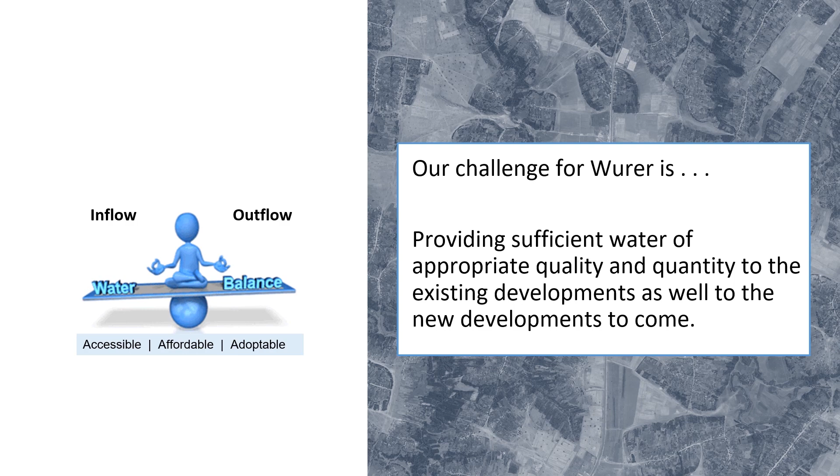We try to redefine the challenge as aims. First, to offer a resilient and sustainable rural transformation, and next, to approach rural challenge with water sensitivity and use it as one of the driving forces for the new development. So, what does it mean? When we say resilient, sustainable, and rural transformation, we meant to integrate existing rural fabric with the new development first, and to use new development as a catalyst for spatial and social cohesion among the communities, and to create an accessible, well-connected, pedestrian-oriented street network.

And what we meant by water-sensitive development is to design a water supply system for providing safe drinking water to the locals and distributing it by gravity without the use of mechanical means as far as possible, and to protect streets from runoff and to replenish the groundwater.

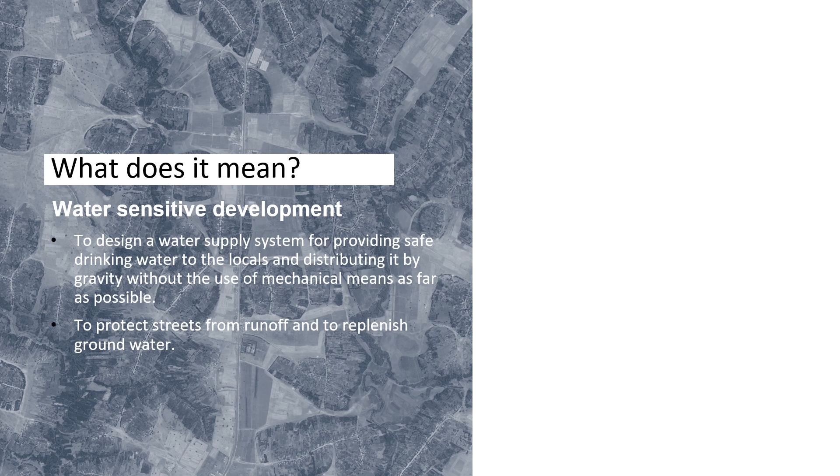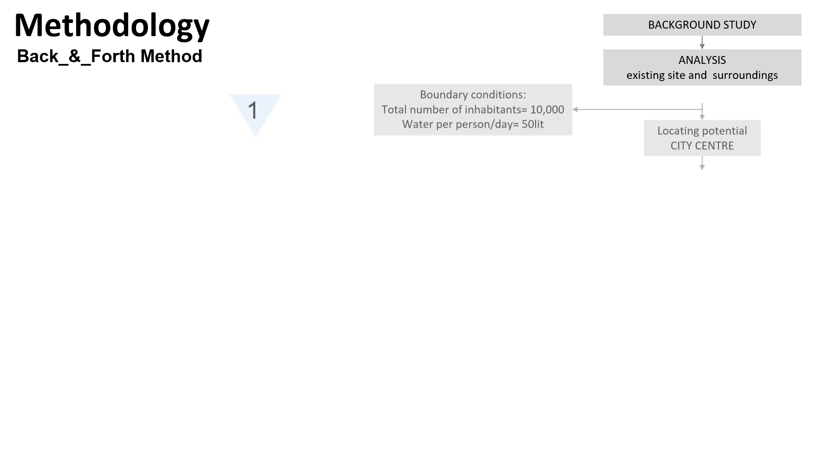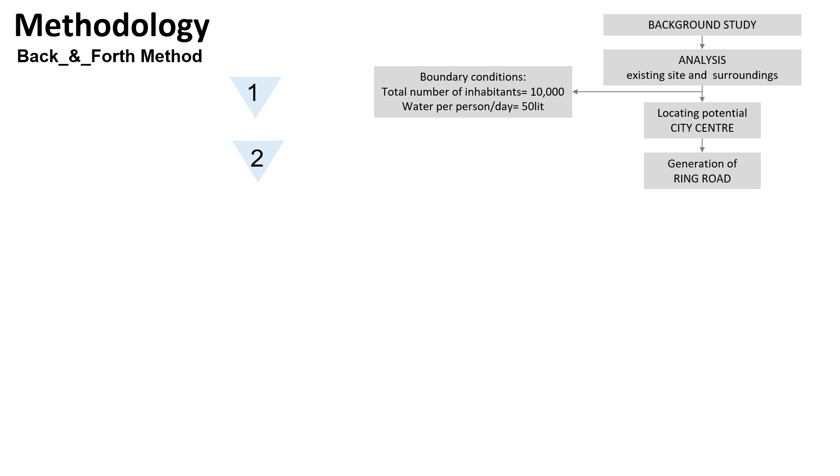The methodology we have tried to follow is a back and forth method rather than the linear one. So, first we tried to see the background study of the site and analyze the existing sites and surroundings. And first we put the boundary conditions as the total number of inhabitants to be 10,000 and water per person per day to be 50 liters. Then we tried to put the potential city center and generated the ring roads. And we get the first result by interconnecting this ring road with the generation of internal streets.

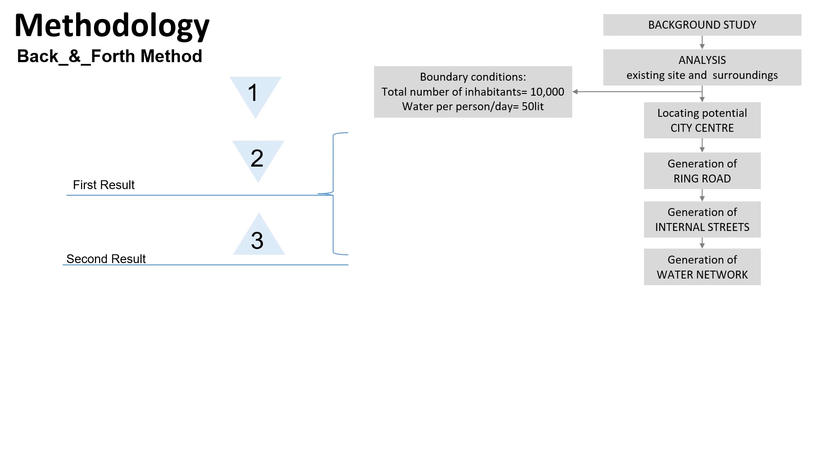Then as a second result, we try to follow the water network and get street networks. The third result is by positioning the water tank in different areas and getting an option for a blend of communal taps and direct access to water, and elevating the water tank to supply water by gravity to each household. Then we get the fourth result by checking the rainwater runoff on the streets. The final result is driven from adjusting streets and water network to reduce the runoff and get the hydrology-driven street network.

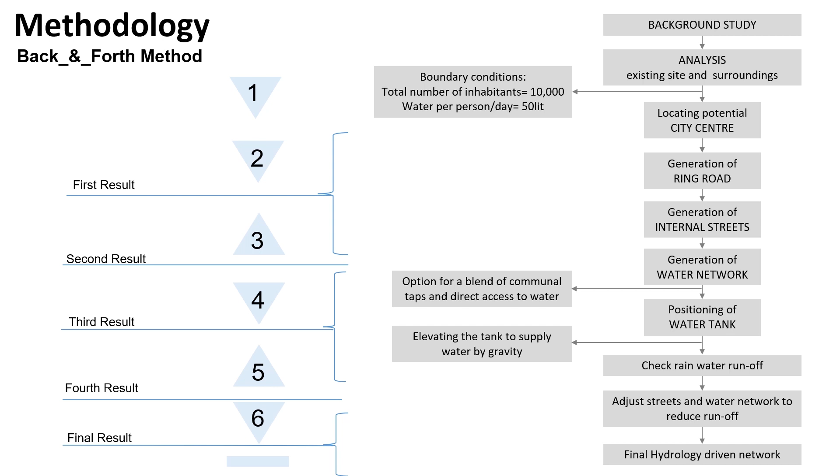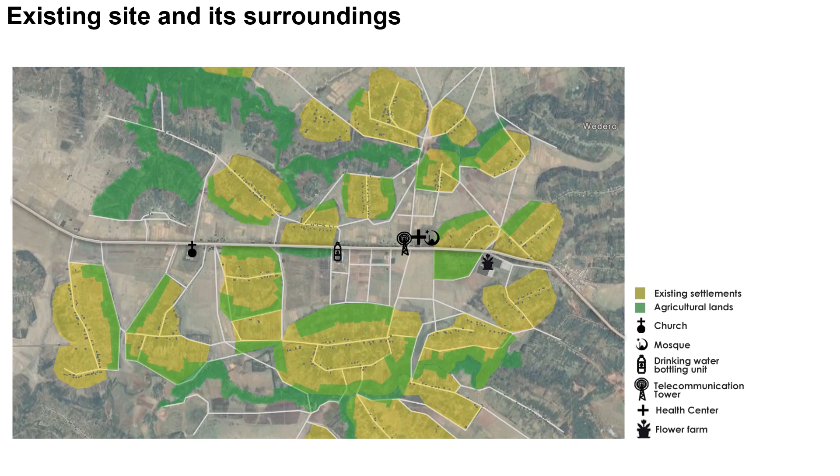Wurer is located in Southern Nations and Nationalities, Gurage Zone, Chaha Wereda. When we see the existing conditions of Wurer, there are different neighborhoods located apart from each other. This will make the infrastructure provision more challenging and costly, and also have an effect on the social connectivity. Inside every neighborhood, there are existing settlements and agricultural land. The main highway in the center dissects the village into two. There are different social and physical infrastructures like mosques, churches, telecom tower, and healthcare. The flower farm and the water bottling factory provide the inhabitants work opportunity.

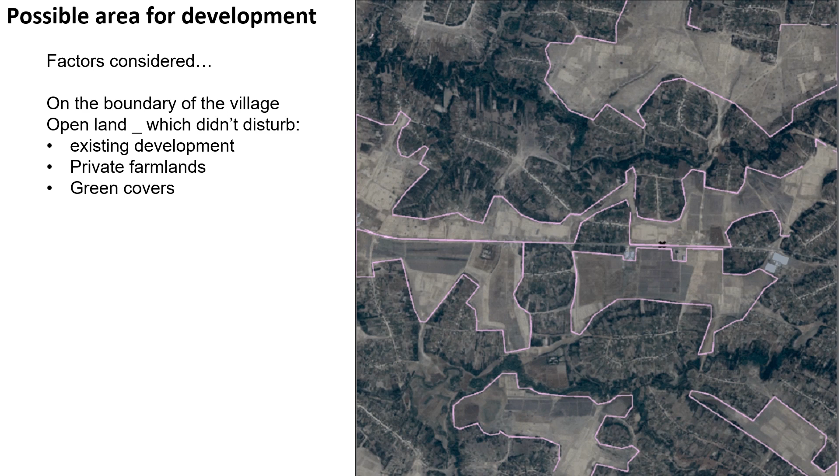When we select a possible area for development, first we consider it to be on the boundary of the village, and it should be an open land which doesn't disturb the existing development, private farmlands, or green covers. One of the end products is a city which can house 10,000 inhabitants, besides creating social cohesion among the disintegrated current neighborhoods. We use the existing main street and observe where there is a relatively larger number of neighborhoods, quarters, and open land available.

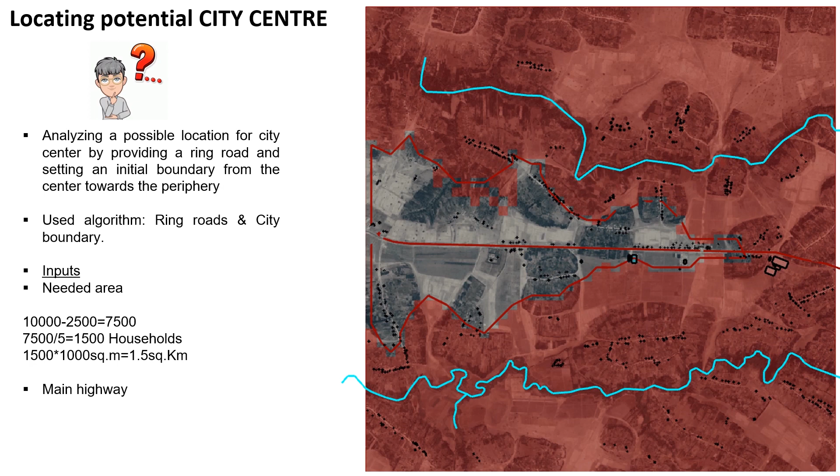Putting this in mind and using the ring road algorithm, we try to define the city boundary and at the same time redirect the current main highway to the outskirts of the development. This in turn creates an opportunity to connect the agricultural production to market easily and creates less traffic and a more pedestrian-friendly environment in the city center. Considering all this, we have put our finalized location of the city center, taking into consideration existing significant infrastructures and using the algorithm of ring roads and city boundary, and we get this final output.

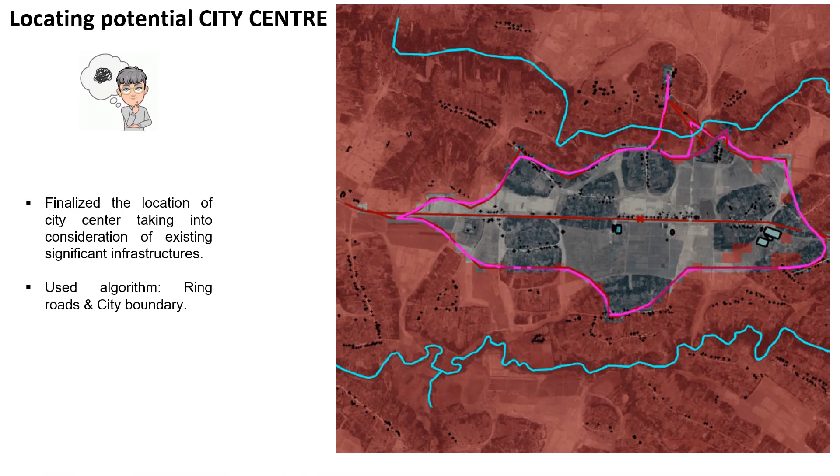As we mentioned earlier, we tried to specify the possible open areas for a new settlement without interrupting the existing ones. Later, we tried to integrate both the existing and newly generated settlement to provide a holistic development approach. Our newly generated street segments possibly covered an area of 1.5 square kilometers, providing 1,000 square meters of space per household and 5 persons in each of them.

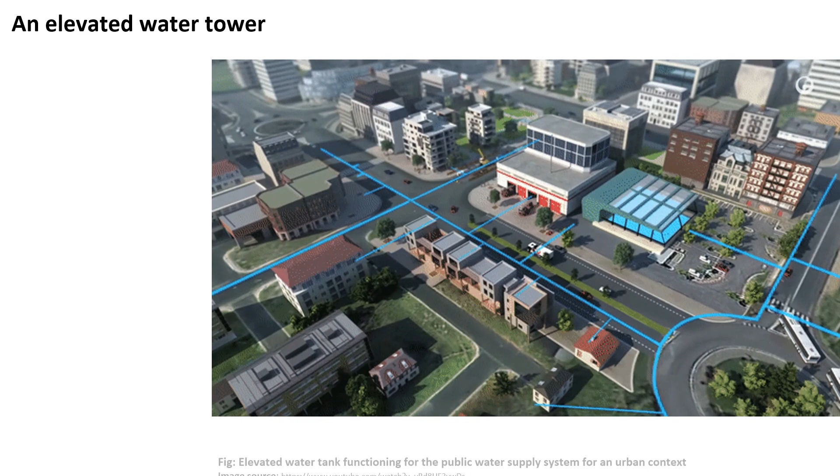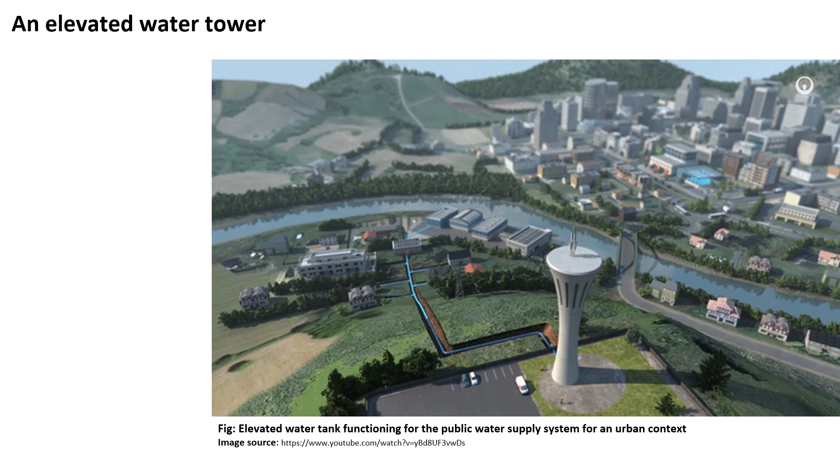After getting the street pattern, we were concerned about positioning the water tank to generate an efficient water supply network for our new city. While analyzing the topography of this specific area, we discovered that the terrain differences are very mild and an elevated water tower might be needed to provide an uninterrupted water supply to the future settlement with the help of gravitational force. Moreover, an elevated water tank could have some advantages, such as not only preserving water but also energy. It helps pressurize the entire water system using its height, and as a result, the pressure within the pipe network keeps the water free of contaminants.

It's important to have an overview of how an elevated water tank functions in order to realize its importance. During the daytime, electricity demand is high, so running a pump might be very costly, but having an elevated water tower would provide an opportunity for the water system to run by itself using the pressure without using a pump during the daytime. During the midnight, the demand for both electricity and water is low, so the pump could run in order to fill the water tank.

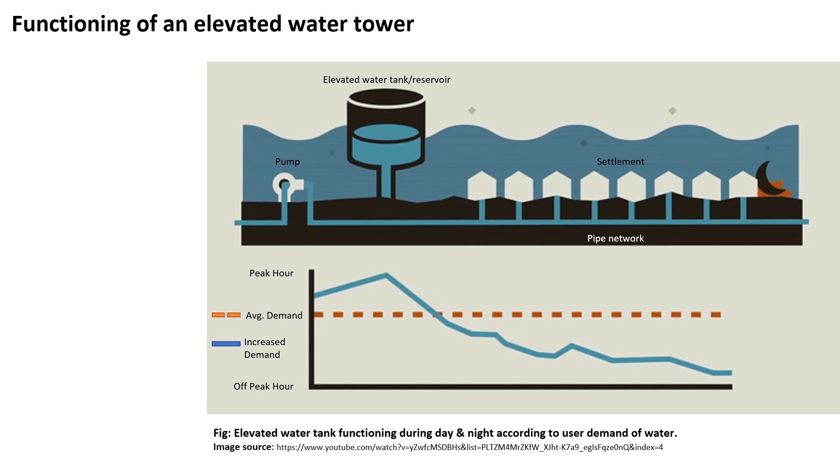As the day starts and progresses, the demand for water will start to increase and eventually be supported by the storage of the tank. The pump itself might not be able to fulfill the demand of the entire city during the peak hours, but it's the water tank that makes the difference in the game. As the day ends, the tank will again be filled with water and get ready for another cycle, which is an ongoing process altogether. It's also important to know how elevated a water tank needs to be.

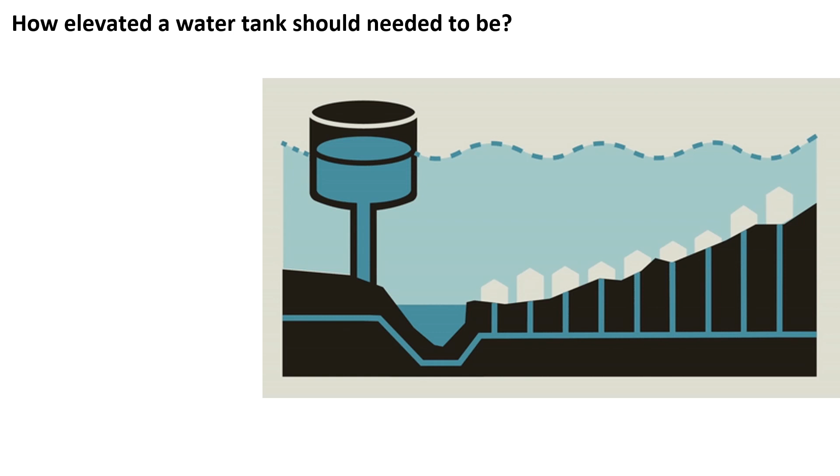Pressure within a body of water is related to the depth. The deeper the water, the greater the pressure. It can be compared to a virtual ocean under which we all live. The water surface in the elevated storage tank represents the surface of the virtual ocean. Thus, a tank elevated to 20 meters creates about 200 kilopascals, and a tank elevated to 70 feet creates about 30 psi of discharge pressure, which is sufficient for most domestic and industrial requirements.

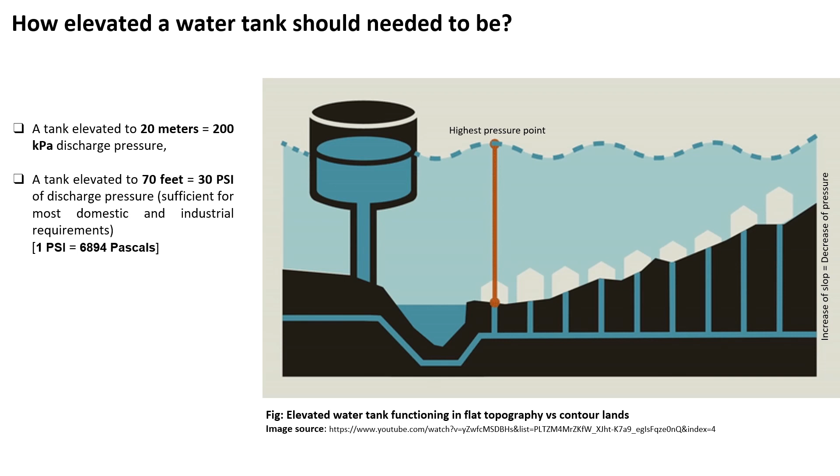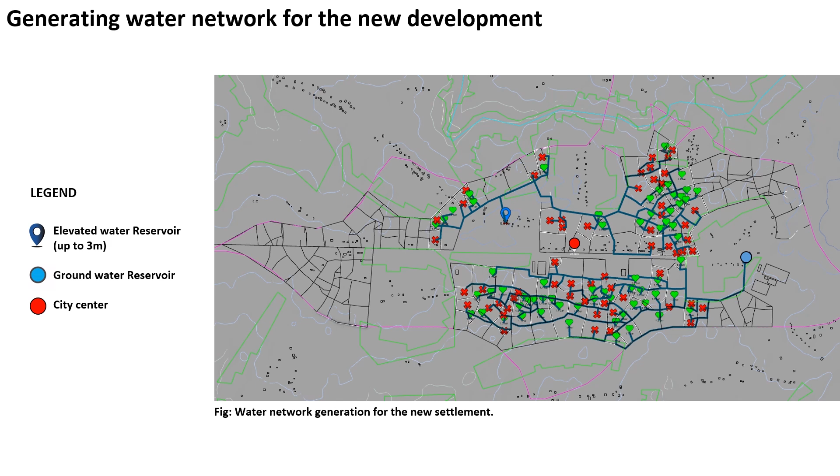Based on the generated street pattern, we tried to formulate the best possible water supply network to provide as much water as possible to the households. We are considering 2 water reservoirs at 2 different locations of the city to provide maximum water supply. Among them, one reservoir is elevated up to 3 meters, considering all the buildings are one-storied initially. The other reservoir is positioned down to earth.

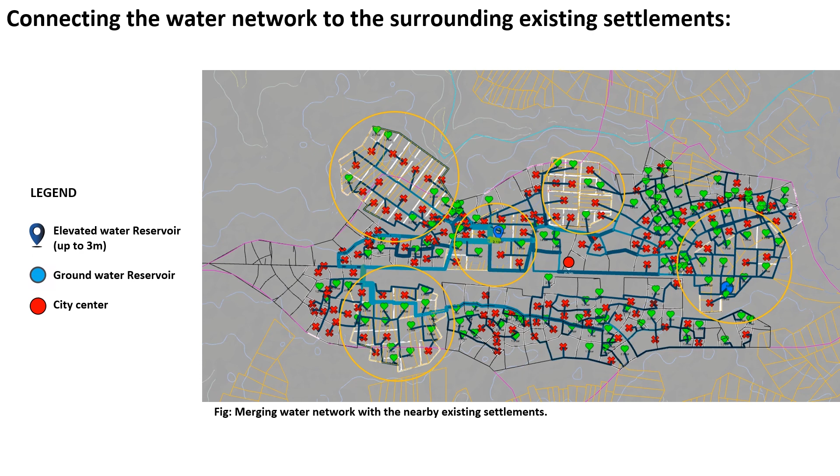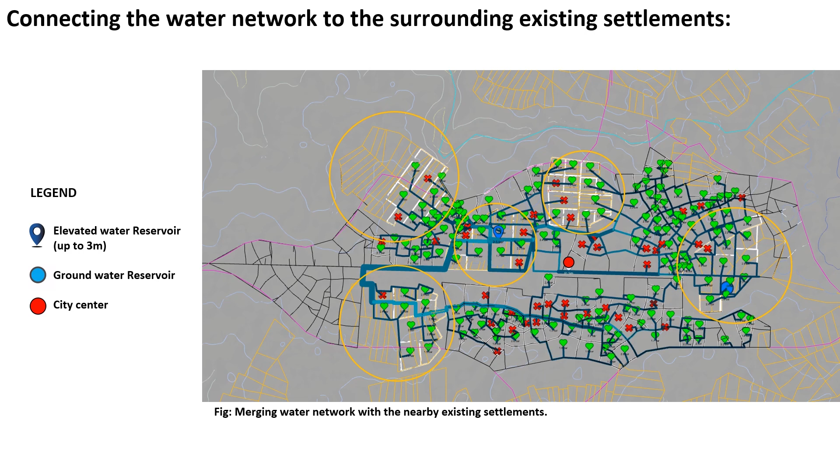After having an efficient water supply network, we tried to merge nearby existing settlements within the supply chain and rerun the urban water generative hydrology network analysis, which worked fine even after the integration of the existing households. We observed an average pressure of 1.7 bar on each supply point, which is more than sufficient for an uninterrupted water supply.

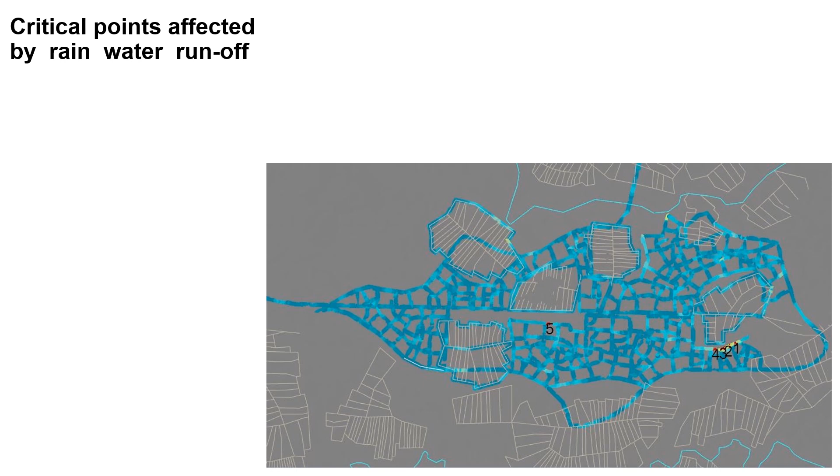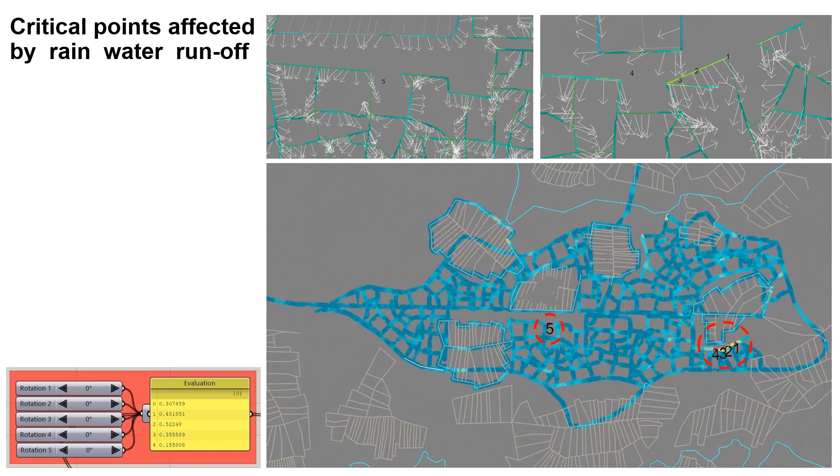After having worked on the street and the water network, we used the runoff analysis to determine the street segments which are most affected by the rainwater. We then adjusted the direction of these streets to come up with a final street and drainage network. Though it is ideal to design streets which are in line with the gravity of water flow, it was quite a challenge. With the use of runoff analysis, we chose 5 most critical points affected by rainwater. The percentage of runoff was between 15 to 52%. We then adjusted the angles of these street segments to best suit the direction of natural rainwater runoff. The percentage of runoff was reduced to around 8 to 16%.

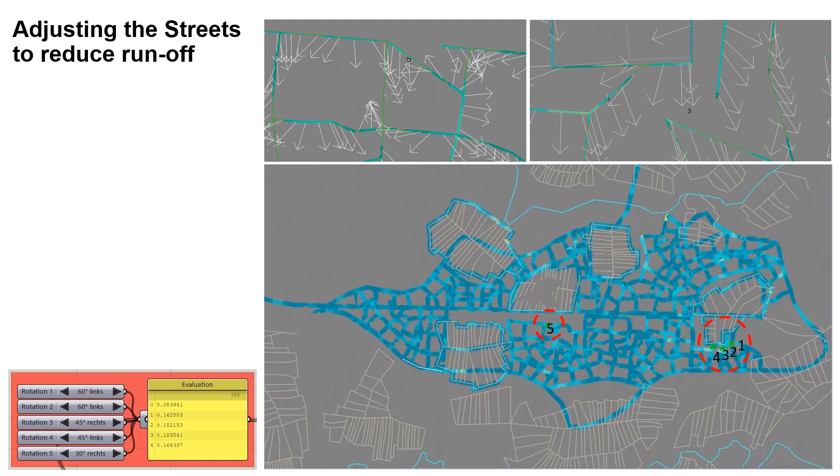Based on the runoff, we finally froze our street and water network. The blow-up here shows the rainwater runoff by gravity and a possible drainage flow. Based on the pipe diameters, drainage lines 1 and 2 can be the primary and secondary lines respectively, and 3 and 4 can be the tertiary lines connecting to the secondary line. The runoff water from all the streets is directed to the river, which is in turn connected to the pump and then the reservoir.

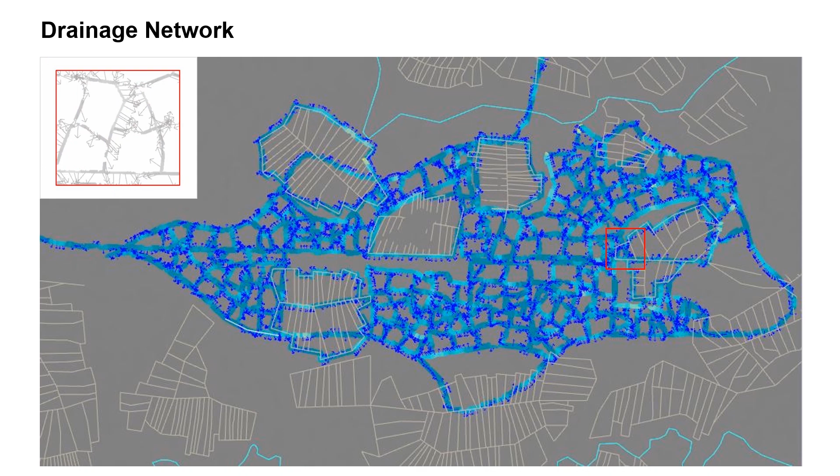Through this task, we were able to come up with an optimized street and water network catering to 10,000 inhabitants with the use of parametric tools. We are now looking forward to further including the aspects of mobility and food in the coming weeks to develop a holistic design which is sustainable and efficient for the local community of Wurer.